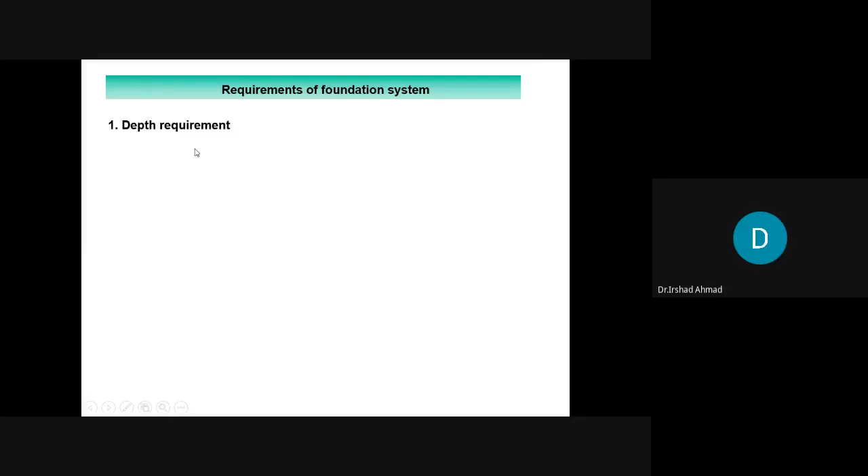Actually this is the second requirement. First requirement is the safety requirement. Second is the depth requirement, space requirement, and it should be economical and functional.

So let's discuss the second requirement, which is the depth requirement. What is the depth of the foundation? This is the ground line, and this is the foundation. This is the base of the foundation, which is called foundation level. The distance between the ground line and the foundation line is the depth of the foundation.

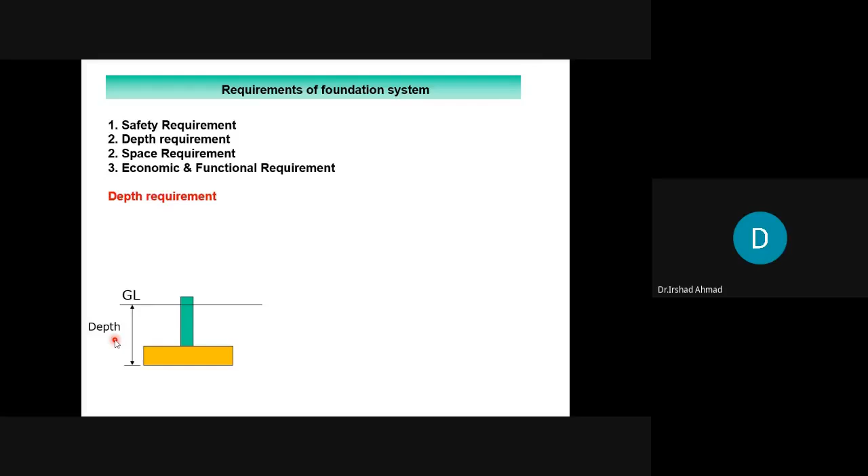How much should be the depth of this foundation? What are the requirements with regard to depth of the foundation? So the first thing you have to take care of with regard to depth is preventing movement due to

soil volume changes by seasonal freezing and thawing of the ground. What does it mean? When the outside temperature is very low, very freezing, the moisture close to the ground would freeze. And when that moisture freezes, the soil increases in volume. But when the temperature rises up, this thaws, it melts.

The moisture thaws. When it thaws, what happens? It shrinks. So this is, for example, the depth where this happens. This volume change happens due to freezing and thawing. So if you build your foundation base here, it would be subject to movement.

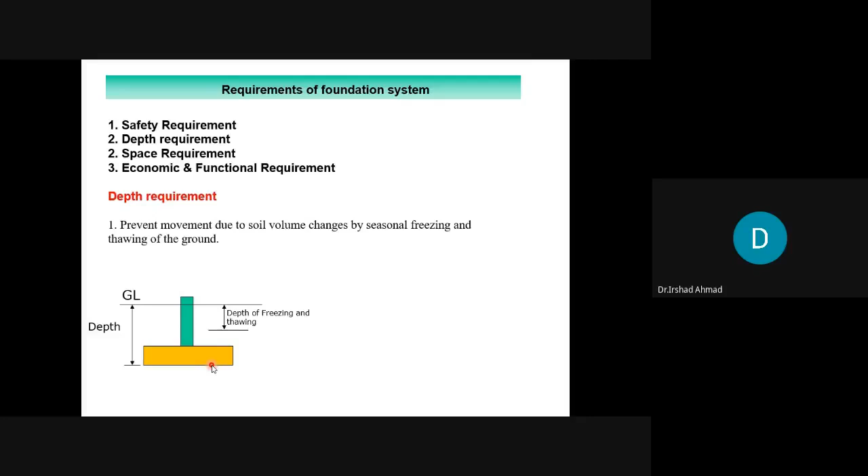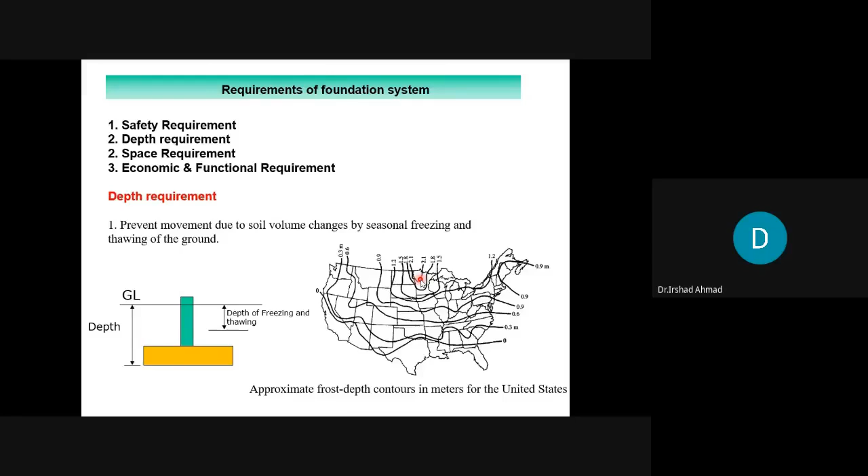Second requirement is: footing should be below zones of high volume changes due to moisture fluctuation. The first point was volume changes due to freezing and thawing, but the second point is due to moisture fluctuation. There could be leakage of pipes, leakage from washrooms, leakage from kitchens, or some rainwater seeping into the ground, or a street drain passing nearby the house.

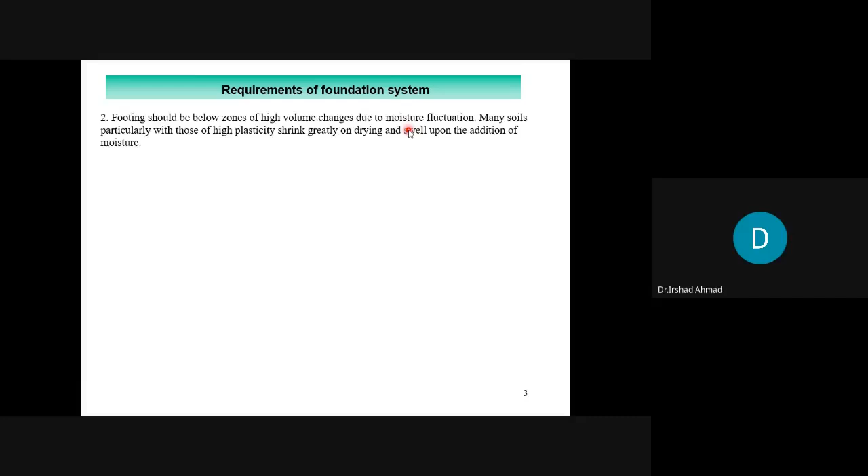There could be leakage, and that moisture can enter into the soil. So what would happen when the moisture reaches the soil? Some soil has a tendency to expand when it gets moisture, and when this moisture dries up, it would shrink. Again, that movement would be transferred. This is the zone of volume changes in soil due to moisture change. So the depth of the foundation should be below this.

Many soils, particularly those of high plasticity, shrink greatly on drying and swell upon the addition of moisture. So that is the zone of volume change. The foundation should be laid below this depth.

Prevent wind or water erosion. If you build a foundation on the ground surface, when the wind blows or when there is water flowing, erosion would happen below the foundation base, and this would undermine the structure. So you have to give some depth so that erosion due to wind or water does not occur.

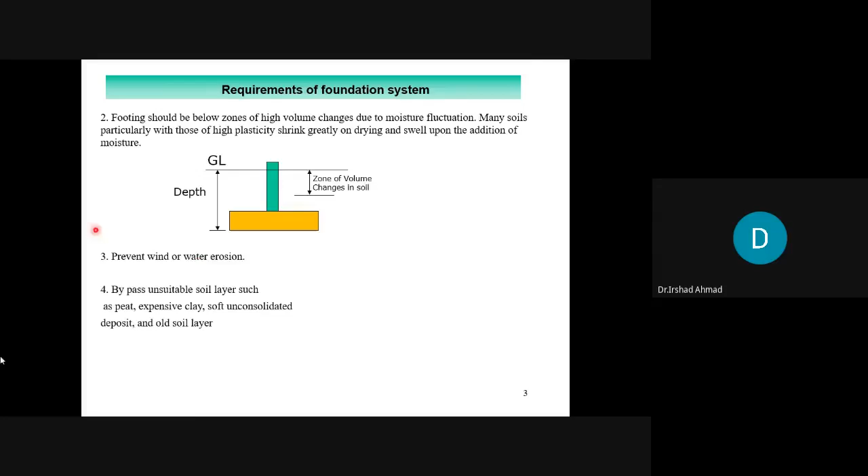The fourth and last point with regard to depth of foundation is bypass unsuitable soil. If you have some unsuitable soil near the ground, like peats or dump soils, you are not going to build your foundation on such fill material. Instead, you would start excavating the ground till you reach a very sound strata, and then you give the foundation. Or you can use a pile.

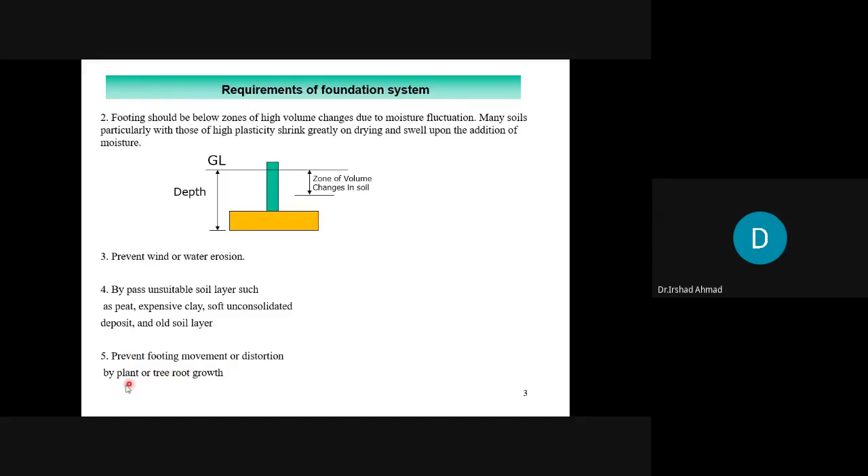The last point is to prevent footing movement or distortion by plant or tree root growth. If the building is close to a tree, the growth of tree roots could damage the foundation.

These roots suck water from the soil, and the amount is different during different seasons, so there would be some volume changes. That's why there should be a depth, so that the changes in volume due to roots does not affect the building.

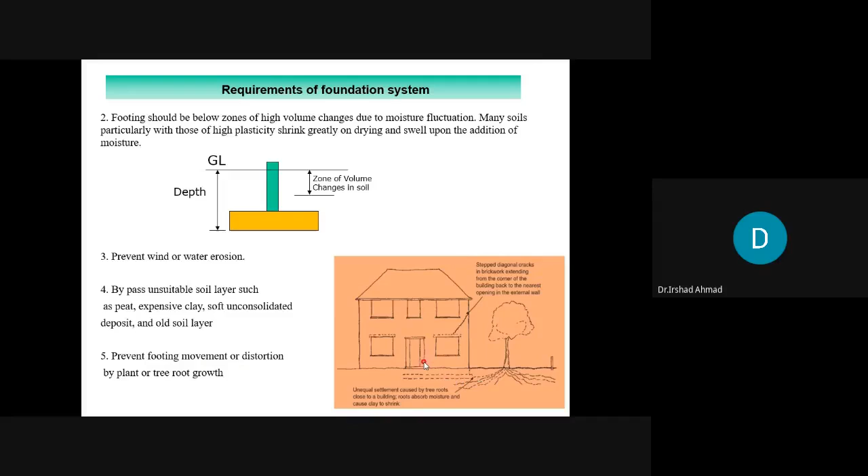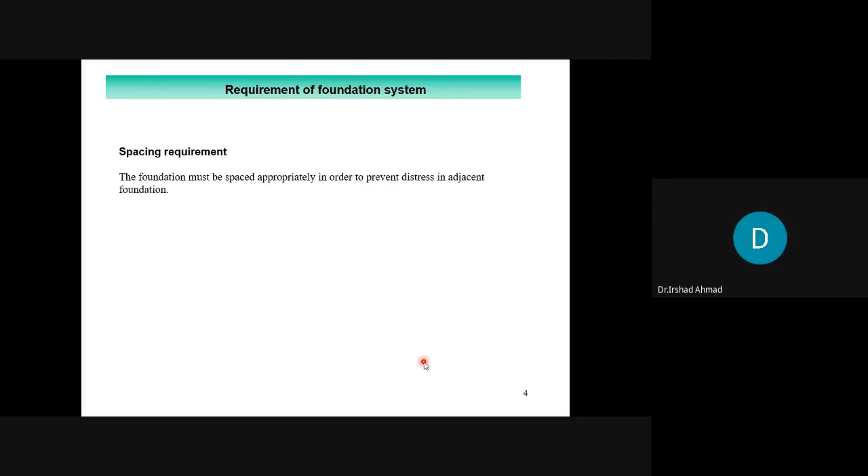The last requirement is the spacing requirement. The foundation must be spaced appropriately in order to prevent distress in adjacent foundations.

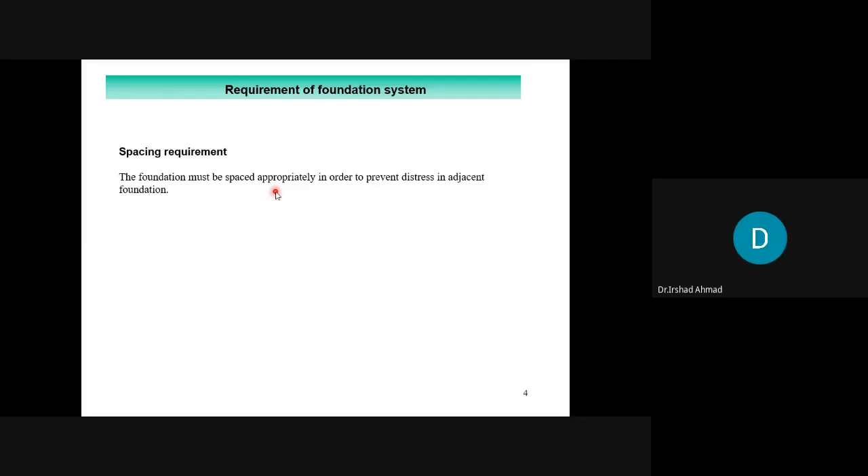If you already have a building, and you want to construct another building beside it, what happens if you excavate the soil below the foundation of the existing building? There could be damage. There is a video, let me share the screen so you can see this.

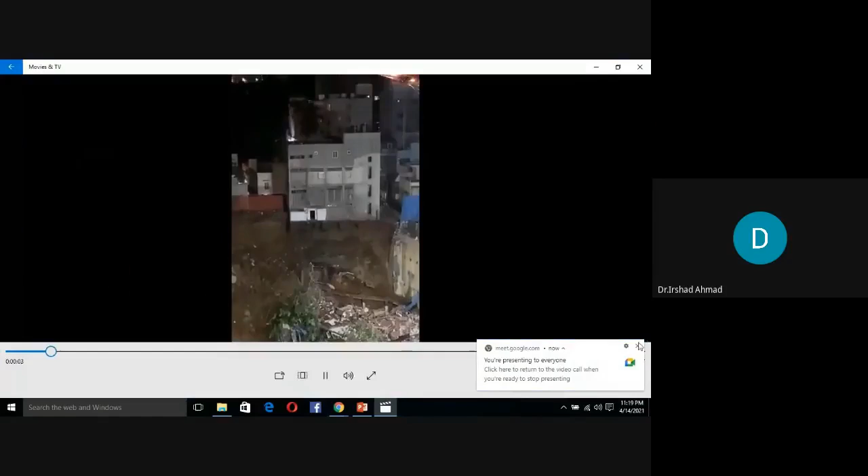You see, this is an existing building. Another building is going to be constructed, but the depth of the new building is much below the existing building, you have given a greater depth. So what would happen? This could happen depending upon the soil condition.

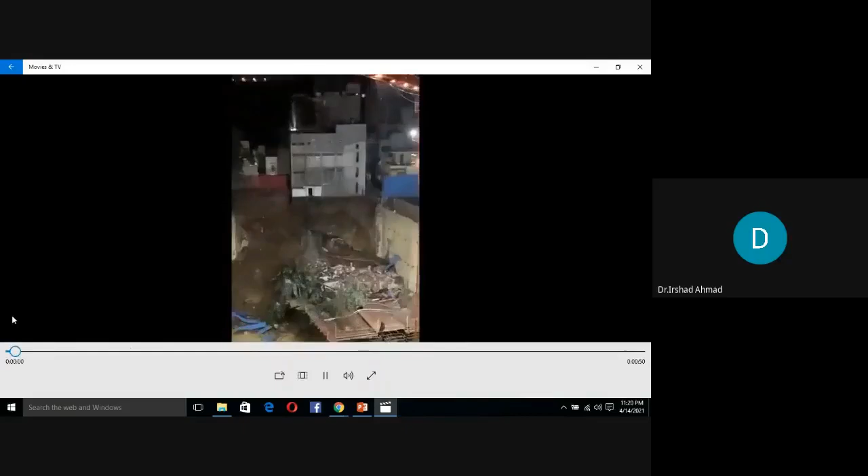So either you have to space your new building much away from the existing building, or you have to provide some supports to the excavation. So what is going on here? No lateral support is provided to the existing building, nor is the new building appropriately spaced.

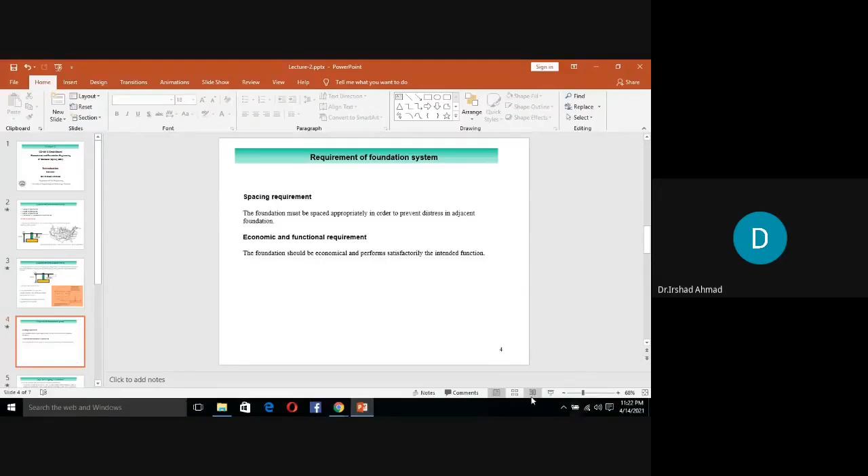At last, the foundation that you are going to design and construct must be economical, and it should fulfill all the functions for which it has been designed. So these are the requirements of a good foundation system. Number one was safety requirement. Number two was depth requirement. Number three was spacing requirement. Number four was it should be economical and functional. These are the four major and basic requirements of a foundation system.

If you have any question, you can ask. No question, sir.

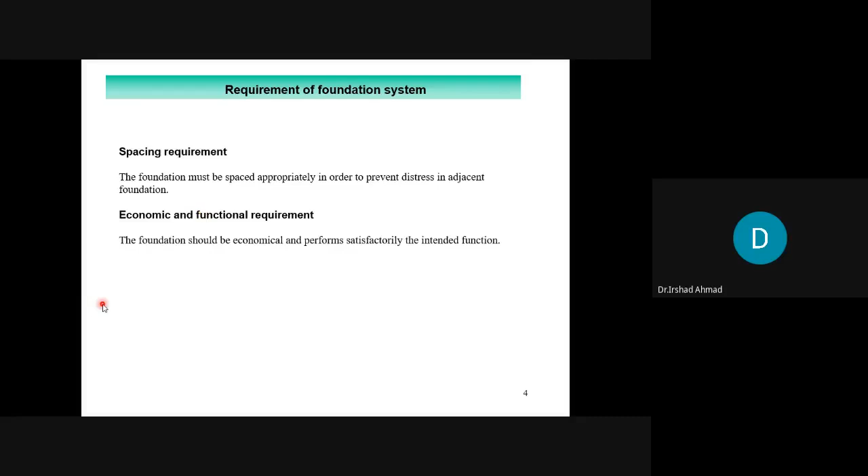Steps for designing a foundation.

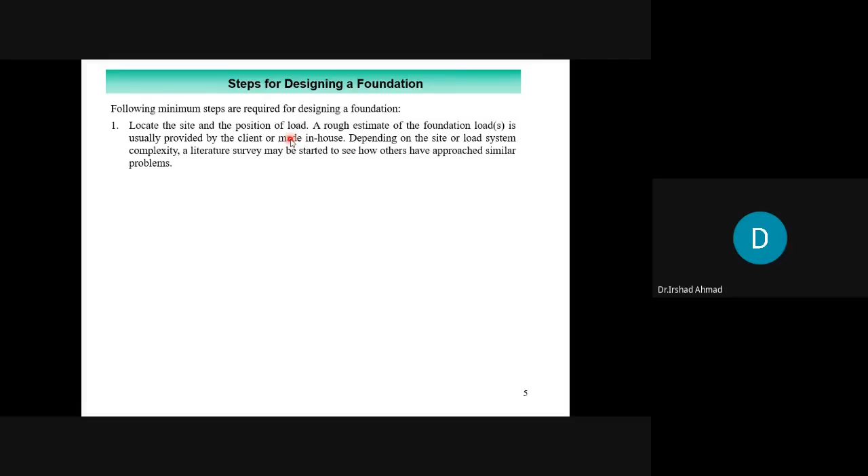You should have an idea where the loads are positioned, where heavy columns are coming, where lift walls are coming, where shear walls are coming. Usually during site investigation this is not available, but when designing a foundation, you must know the load position and also the loads. A rough estimate of foundation load is usually provided by the client or made in-house. Depending on the site or load system complexity, a literature survey may be started to see how others have approached similar problems. So you should have an estimate of the foundation loads before designing a foundation.

It could be given to you by a structural engineer, and usually this is the case. Structural engineers do the analysis and give you the loads. In developed countries, in major consultancies, there is a structure office and a geotechnical office. The structure office does the structural analysis and gives you the loads. But at the time of soil investigation, you do not have a very clear idea of the loads.

Second, you go physically to the site for any geological and other evidence. You go and see how the topography of the site is. Is it flat or hilly terrain? Are there trees or flowing streams? You check if there's a slope and whether there's pre-existing slope failure. You record all these observations.

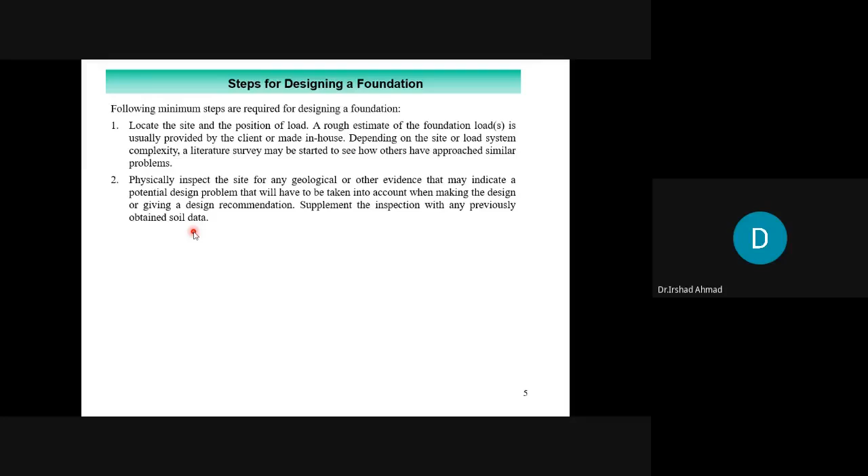If you have data from previous boreholes in or around the site, that gives you a very good idea of the subsurface. If you're running a geotechnical lab, you may have data of the surrounding sites. With that, you have a pretty good idea of how the field exploration should go, and at this stage you establish a field exploration program.

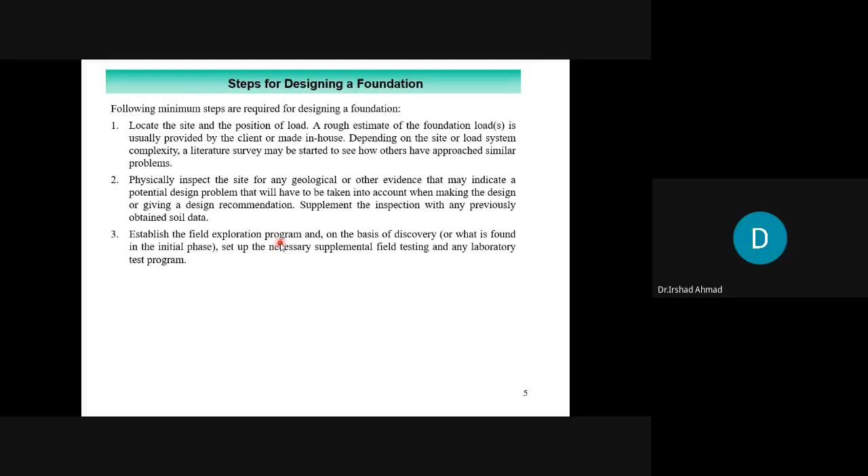How many boreholes should there be? What should be the depth of the boreholes? What type of tests should you conduct in the field, and what type in the laboratory? If you already have information about the strata, that's a tremendous help. Otherwise, you can drill some preliminary boreholes to get a good idea of how deep and how many the rest should be.

When you conduct all these tests, boreholes, field tests, laboratory tests, for a big project you might do, say, 30 boreholes. You have plenty of data. So what do you do with that data? After conducting these tests, you have a large amount of data on your table, and you need to design your foundation based on this data. But there is a lot of scatter in the data.

So based upon your experience, you extract soil design parameters from all this data. You may need Excel sheets or other programs to help organize the data and get the soil design parameters.

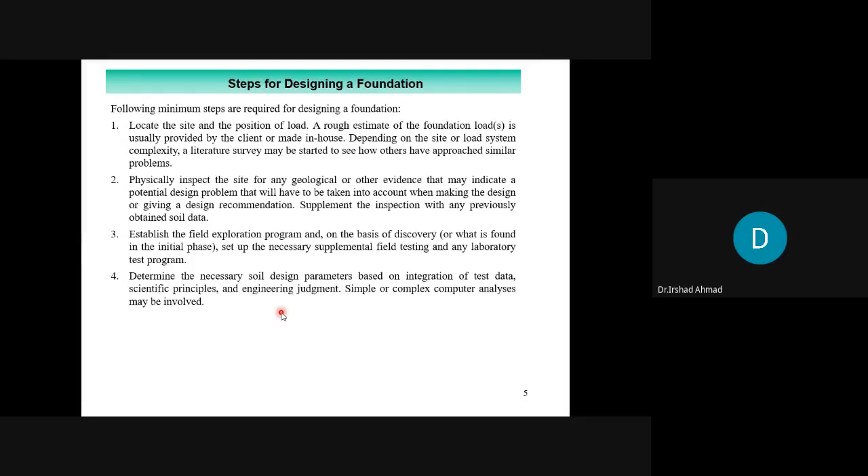Once you get the soil design parameters, you design the foundation using them. While designing the foundation, you need to interact with the client, because the client pays for the foundation cost. You also interact with the engineers, particularly the structural engineer, the architect, and the contractor, since the contractor is the one who will actually build the foundation. Does he have enough resources and technical background to build the foundation you've designed?

A computer program for designing is a must nowadays. For example, if you're designing a mat foundation, you have to do the structural analysis, get the moments, and design the foundation. These are the major steps involved in the design of a foundation.

For any major project, normally it's the structural engineer who designs both the superstructure and substructure, and he already has some bearing capacity value from the geotechnical lab. That's the routine. But for major structures, there has to be interaction between the structural engineer and the foundation engineer.

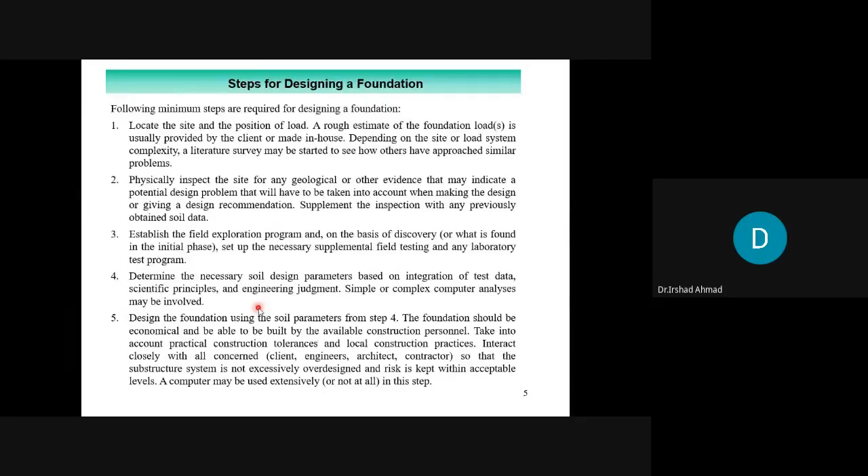You need subsurface information, for which you drill boreholes, or conduct non-destructive testing, called geophysical testing. Geophysical testing means you don't drill any borehole, but do other tests you might have studied, like seismic reflection survey, seismic refraction survey, multichannel analysis of surface waves, or soil resistivity tests. These tests are conducted on the surface but give information deep into the ground.

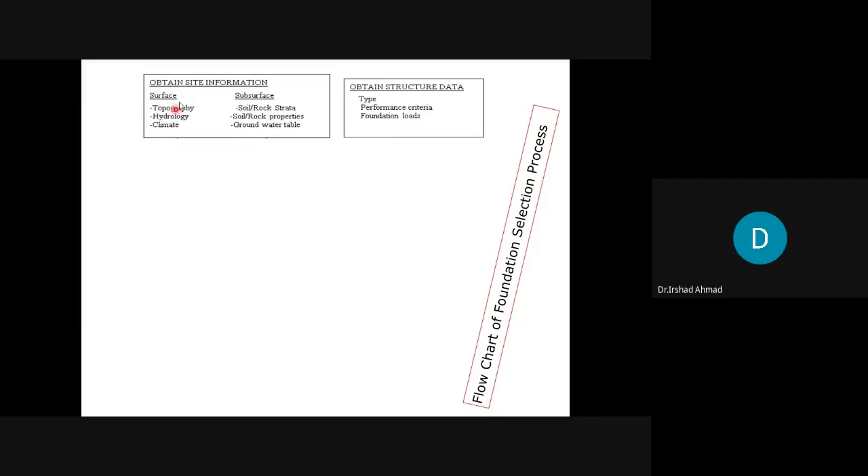Then when you get the soil information, you got the structure information, you go down and you have foundation alternatives. If you have a menu of foundations to pick from, you have shallow foundations. In shallow foundation, you have square footing or isolated footing, strip footing, combined footing, combined rectangular, trapezoidal, strap footing.

Or mat foundation. You have deep foundations like pile foundations, ground modification for shallow foundations. This is not a type of foundation, but this is an alternative. Where there is weak soil available, you have an alternative to replace or improve that soil and provide a shallow foundation. Or you can go for a deep foundation. Whatever is economical, buildable, you go for it.

Anyway, you pick an alternative, probably first from a shallow foundation. Why shallow foundation? Because it is easy to construct, it is economical. Then you go down and see the behavior - how much this foundation would settle? What would be the bearing capacity? Its lateral stability, any environmental problem...

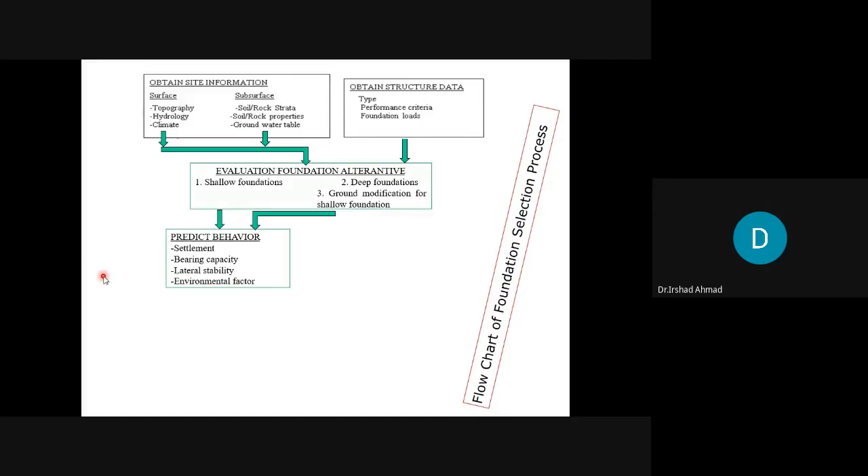for constructing this foundation. Then this is the predicted behavior. You compare this with the required behavior. For example, settlement is 3 inches, but you require 1 inch, so that foundation is not going to work. Or the bearing factor of safety with regard to shear, you require, for example, 3, but it comes out to be 2. Similarly, lateral stability.

And you do the cost estimate as well here. If your foundation is not working, the behavior is not good compared to the required behavior, what you would do - you go back and select another foundation type. So this cycle would go on unless you reach the final answer. Final answer would be that the predicted behavior compares with the required behavior, the cost is minimal, there is no potential construction problem. Then you go down and recommend that type of foundation.

And then you build drawings and prepare detailed design plans, specifications. And after that, you can also monitor construction. Monitoring of construction, you can put some instrumentation in your foundation, and as the building is being built, you can monitor the actual behavior and see if this actual behavior is...

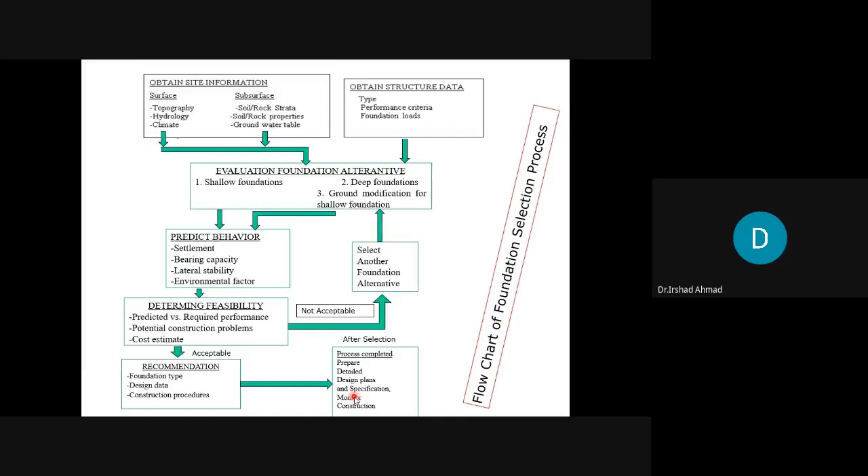Types of load - we talk about loads, so we will briefly talk about load. What are the different types of load? You already have an idea. There are principally 3 types: dead load, live load, and environmental loads.

Dead loads are those like self-weight of a material, of a building, like the weight of the wall, weight of the slabs, weight of the beams, weight of the columns. They are fixed in their position, fixed in their magnitude, so they are called dead loads. They are more deterministic. They all come upon the foundation. The foundation must be able to deal with dead loads.

There is another category of load which are called live loads, like human load - the people who use the facility. There is a variation in the magnitude. At some events, the mall will be filled with people.

But at any other time, like night time or early morning, there were few people, right? Also, it is not fixed in location, the people move around. So this is called live load.

There are other loads that are environmental loads, like snow, wind, suction, earthquake. All these loads are environmental loads. So the structure and the foundation must be able to resist all these loads.

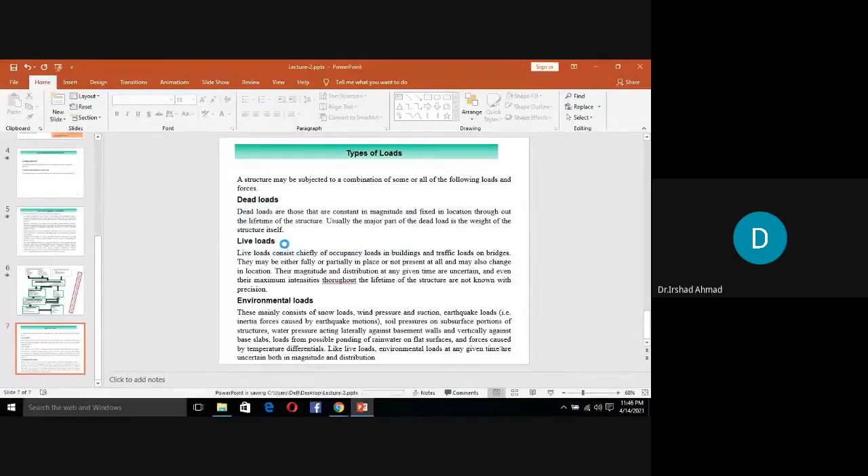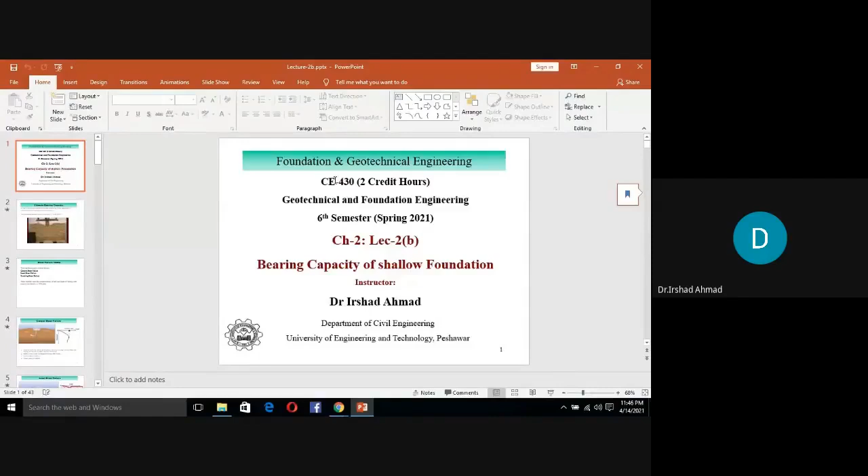This is chapter number 2, lecture 2B. This is about bearing capacity of shallow foundation. This is a very major chapter, and it will take about 4 more classes to complete.

Initially we will have some definitions about different types of bearing capacities. Then we would have what are the different types of shear failures. Then we will have some bearing capacity equations, which are Terzaghi and Meyerhof. Then we would solve examples. So all this would take about 3 to 4 more lectures.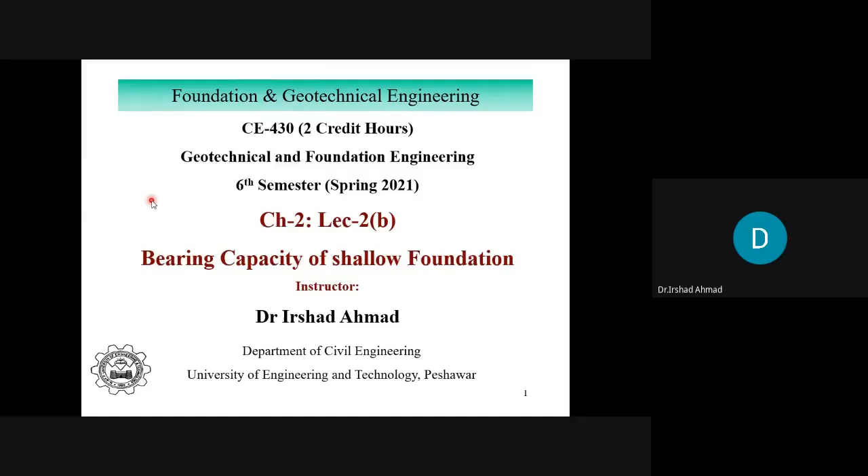So let's start. That is ultimate bearing capacity. Can anybody tell me what is the ultimate bearing capacity?

The load which a soil can withstand. Yes, to some extent, but more specifically, can anybody answer? Soil has no ability to bear more load beyond its range, that is ultimate bearing capacity.

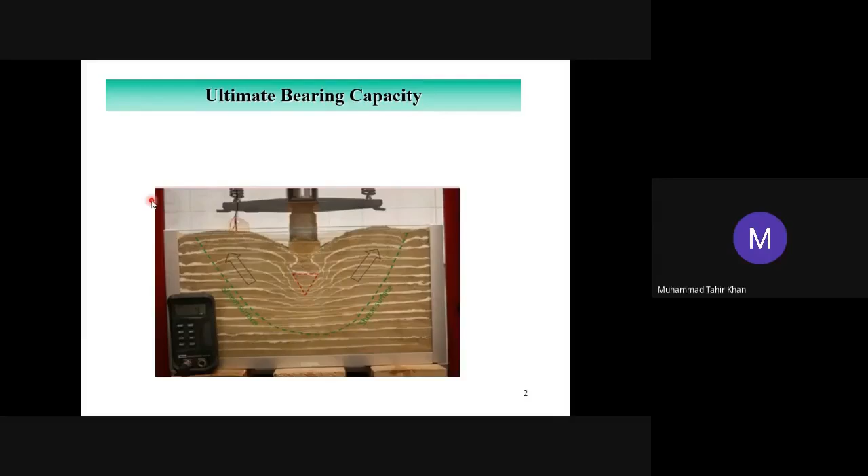In the first lecture, I discussed with you a simple example, right? And what was the value of ultimate bearing capacity in that example? Can anybody recall? 10 tons per square foot. That was the value of ultimate bearing capacity.

Theoretically, it means that if you apply a pressure on the soil, if the foundation applies a pressure of 10 tons per square foot, the soil would fail in shear under the foundation. If you apply 9 tons per square foot, theoretically it would not fail in shear. But if you apply more, like 15 or 20 tons per square foot, it would fail in shear.

So the definition would go like this: it is the least pressure which would cause shear failure of the supporting soil immediately below and adjacent to a foundation. If you apply load on the soil, it would deform like this and develop shear planes. That is called shear failure of the soil.

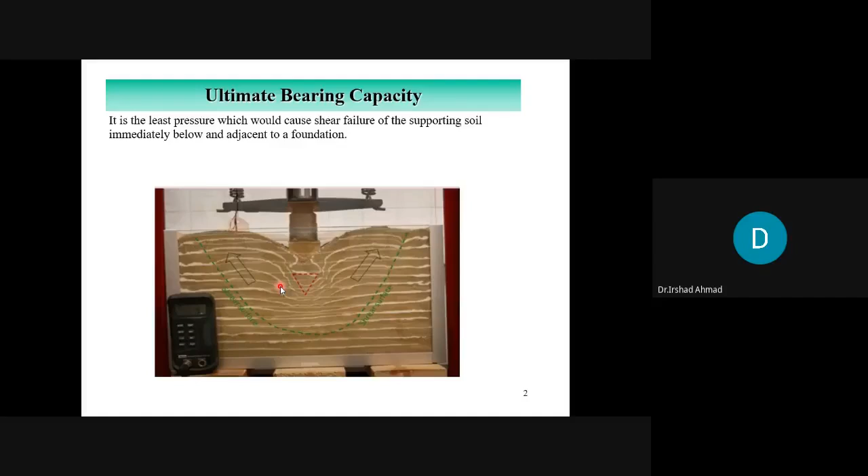Unit of ultimate bearing capacity is of stress units, like kPa, kilonewton per meter square, or ton per square foot, or KSF, kips per square foot.

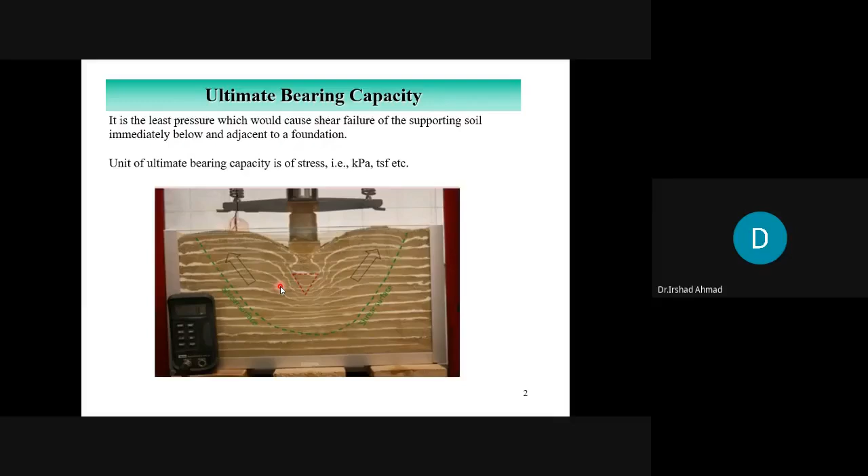Let's talk about different shear failure modes. There are 3 types of shear failure modes: general shear failure, local shear failure, and punching shear failure.

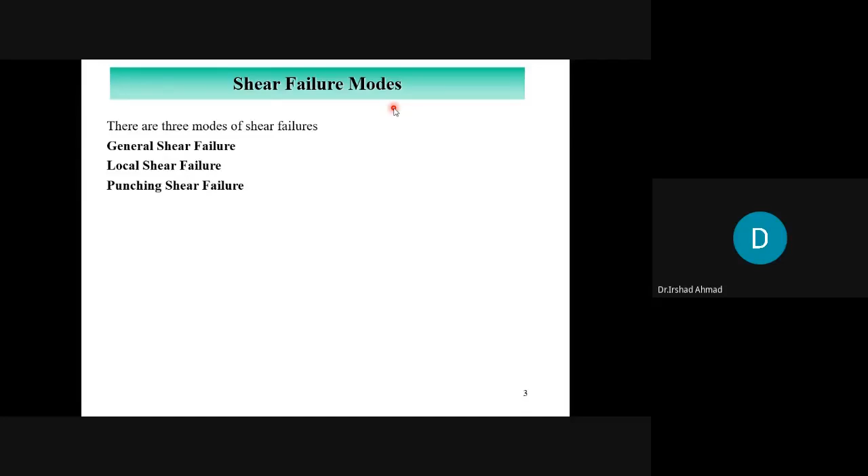Let's first talk about general shear failure, but prior to this, which of these 3 types would occur depends upon 2 parameters: compressibility of the soil and depth of footing with respect to its breadth, meaning how deep the foundation is. So there are 2 things. First we will talk about compressibility, and then we will talk about the effect of depth of footing.

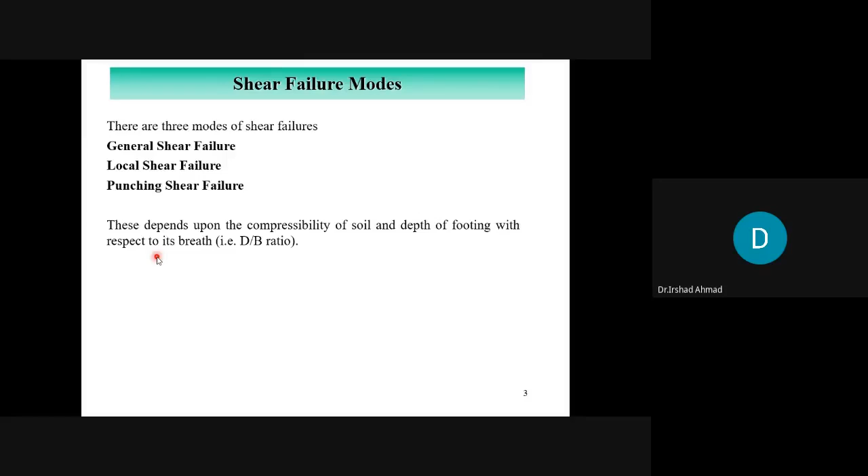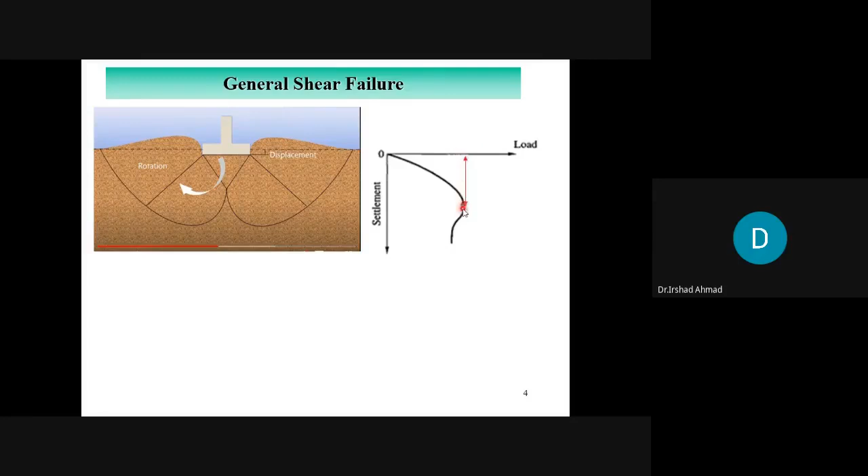So this type of failure is characterized by a well-defined failure pattern, consisting of a wedge, and slip surfaces and bulging of the soil surface adjacent to the footing. Sudden collapse occurs, accompanied by tilting of the footing. In general shear failure, when the failure occurs, you would see there is a tilting, the foundation would tilt on one side, it would rotate on one side. This occurs in dense or very stiff soil.

Failure load is well defined, you can read the failure load from the curve very easily. This is called general shear failure. If you have any question, you can ask.

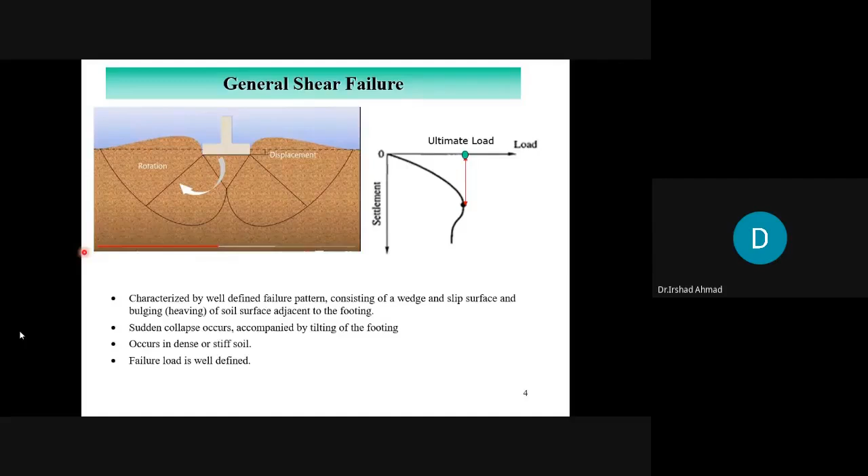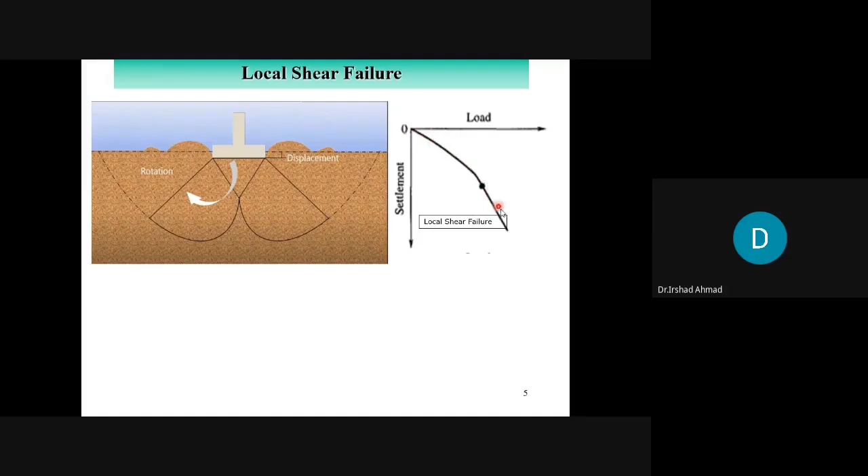Now, local shear failure. Local shear failure would occur in compressible soils. The shear planes are developed like this, but they do not go up to the ground, and there is slight bulging. But there is greater displacement compared to the general shear failure. The general shear failure curve would come somewhere here, but local shear failure would be down here, with greater displacement.

This is general shear failure. For the same load, there is greater displacement in the local shear failure. The failure pattern consists of wedge and slip surface, but is well defined only under the footing. Slight bulging of soil surface occurs. Tilting of footing is not expected. Large settlement occurs, and ultimate load is not well defined - like in the case of general shear failure where you pick the load clearly, here it is not very well defined. This occurs in soil of high compressibility.

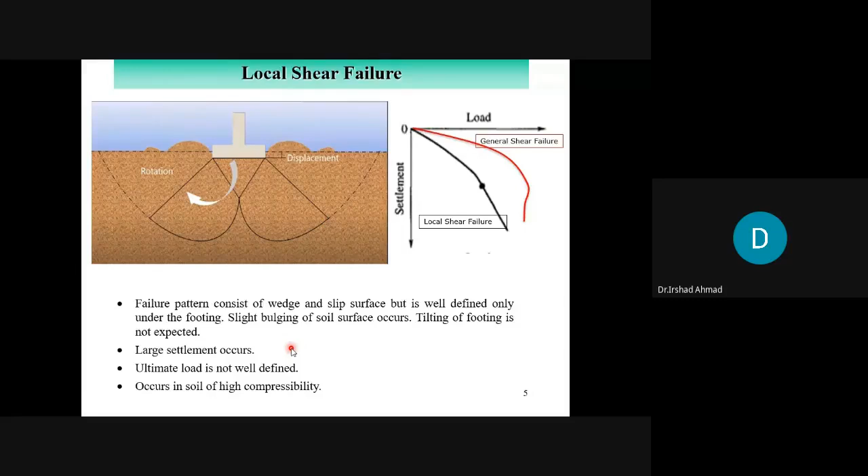The third one is the punching shear failure. This occurs in very soft soil. As you apply load, plastic movement would occur, and the foundation would continue to settle with large displacements. The curve would be like this - you see, this is general, this is local, and this is your punching shear.

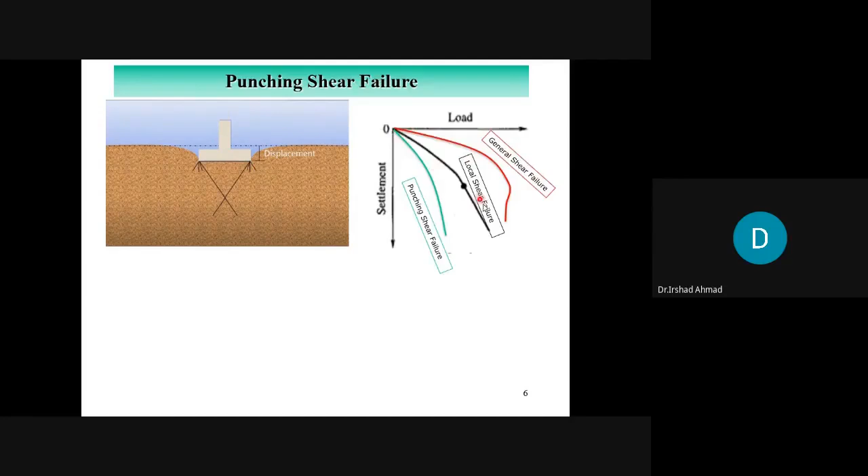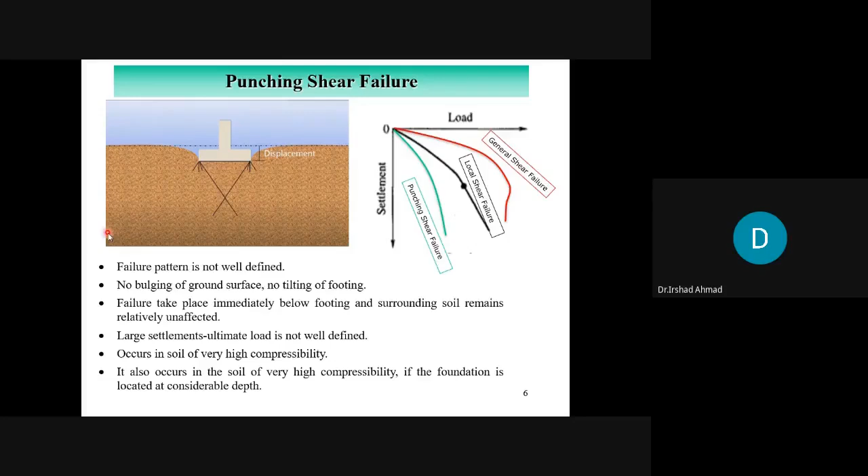Here, the failure pattern is not well defined. You see, you cannot pick the peak. The slip planes cannot move up because these are not very stiff soils.

No bulging of ground surface, no tilting of foundation. Failure takes place immediately below the footing and surrounding soil remains relatively unaffected. Failure occurs just below this, it moves down like a punch, it is punching into the ground. This occurs in soil of very high compressibility.

The last sentence, I'm not reading, I would explain it to you, but till now, if you have any question, you can ask.

So this is one aspect of shear failure types, which was based upon compressibility of soil. Another aspect I told you is about depth of the footing.

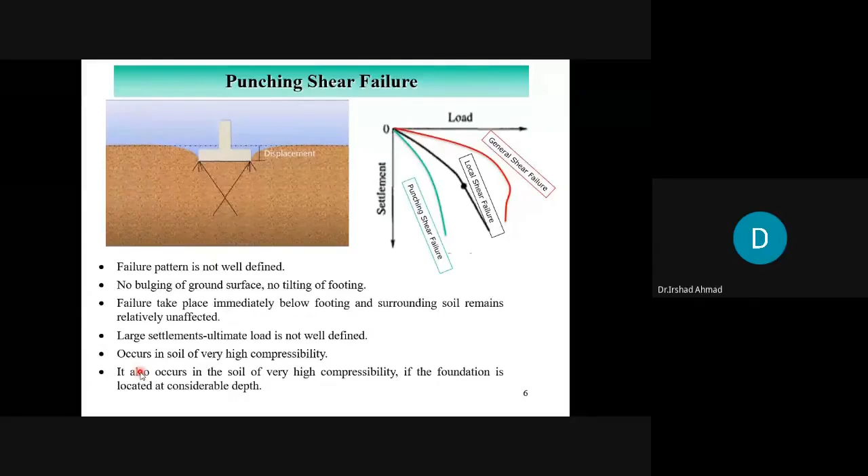Capacity, all these have been discussed in this class. We have reached up to this slide.

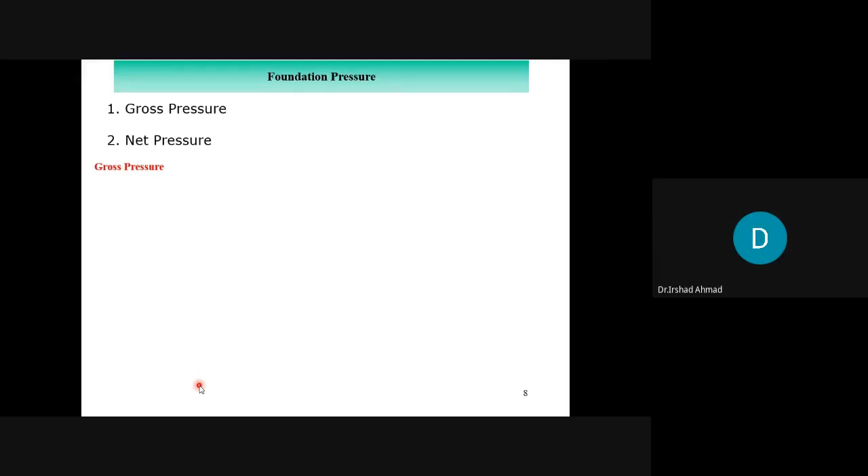So at this level, what do you think the pressure would be? From which sources? What are the sources of pressure at this level? Can anybody tell me?

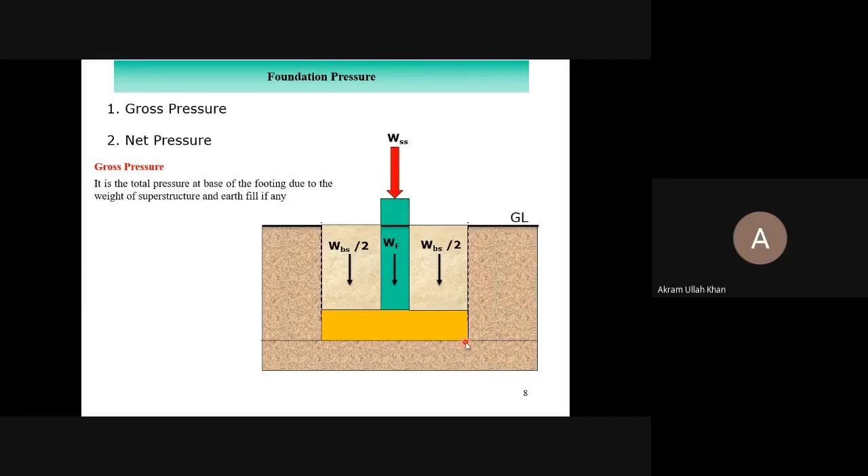And divide by the area. Which area? The lower foundation area. So for square footing, what would it be equal to?

Assuming this is the depth of the foundation and this is the breadth of the foundation - this is D, depth, and this is B, width of the foundation. So what would be the foundation area for a square footing? B square. Okay, good.

Q gross would be equal to WSS, WF, WBS divided by A, which is area of the footing. And Q is equal to gamma D.

The pressure outside the foundation plane is the self weight of the soil. This is unit weight of the soil, and this is D. Q is equal to gamma D.

Let me explain this area again. This area, B into B, is the area of contact of the foundation with the soil. For square footing, it is B into B. What is this A? It is the area of contact of the foundation with the soil, which is distributing this load.

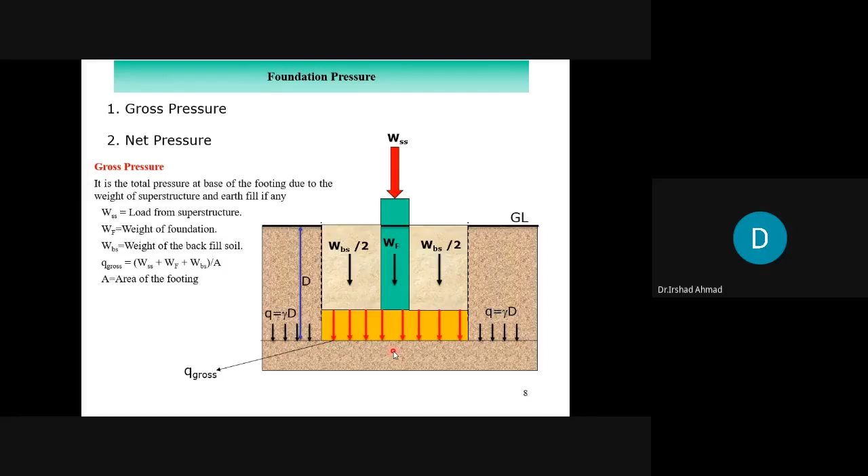It is as if there were 2 bags on your back, and I remove these 2 bags and put 10 bags. So how much is the increase in the load? It is 8 bags, right? So that increase in load is called net pressure.

Prior to the construction it was Q is equal to gamma D. After construction, it's Q gross. Net pressure is Q gross minus gamma D. This is called net pressure.

You can put in the values of Q gross here. Q gross is this from the previous slide, and minus gamma D.

In this equation, if you assume that weight of the foundation and weight of the backfill soil is same, you assume that weight of the foundation, which is concrete, is roughly equal to the weight of the soil.

So weight of foundation plus weight of the soil divided by area would be roughly equal to gamma into D, unit weight of soil into depth of foundation. Do you agree with this? Yes, sir. Okay.

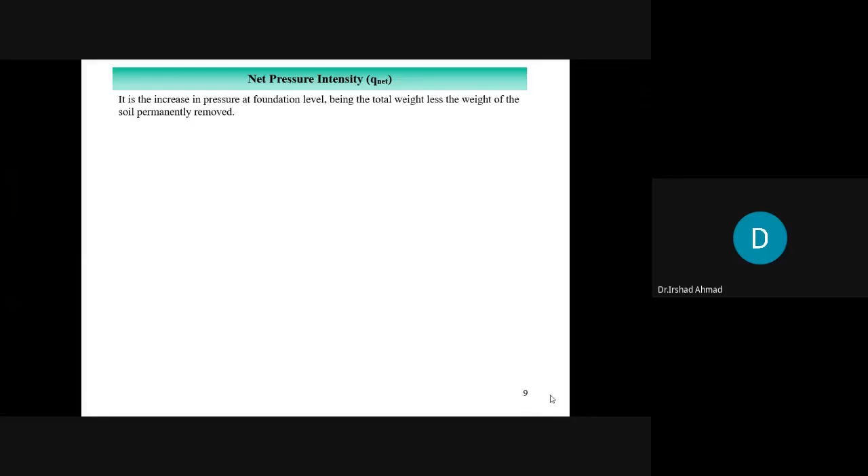Bismillahirrahmanirrahim. So that was the net pressure intensity. It is the increase in pressure at foundation level, being the total weight less the weight of soil permanently removed, that we explained.

Safe bearing capacity. Can anybody tell me what is safe bearing capacity?

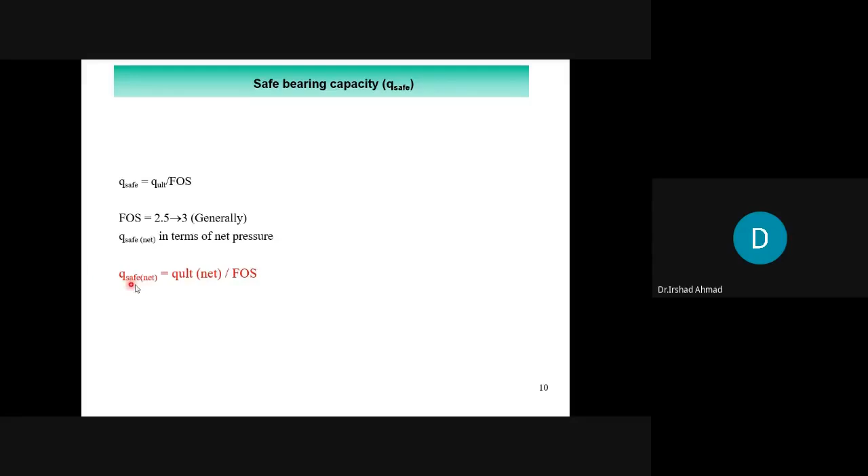Q safe could be represented in terms of net pressure. Q safe in terms of net pressure is equal to Q ultimate in terms of net pressure divided by factor of safety. And Q ultimate minus gamma D, divided by factor of safety, is Q safe in terms of net.

From where will you get this Q ultimate? That would be from different methods. The ones we would discuss are the Terzaghi bearing capacity equation and the Meyerhof bearing capacity equation. From there you will get Q ultimate, minus gamma D to make it net, divided by factor of safety, so you got Q safe in terms of net.

So if you use this equation or that equation, what is the difference? Where does the difference lie? What does it actually mean? If you are using this equation, your applied pressure should be less than or equal to Q safe. This is the limit. Q safe is the capacity of the soil, and the applied pressure should be less than Q safe.

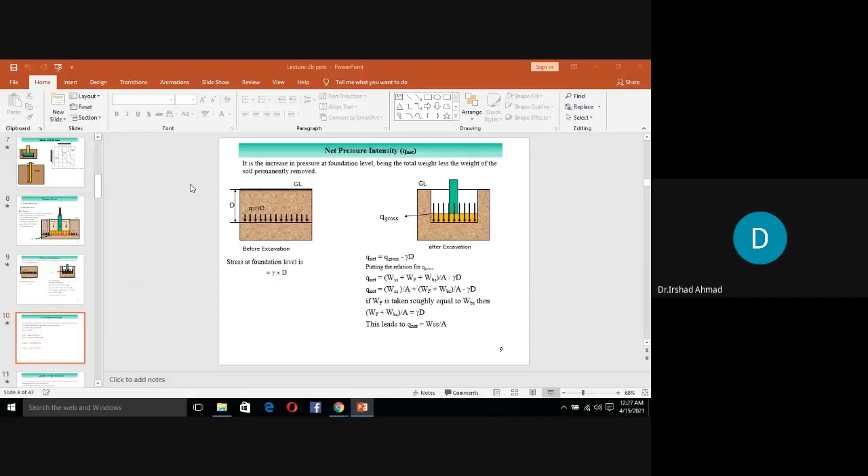Let me write it here. Should be less than or equal to... if you are using net pressure, then the applied net pressure will be less than or equal to Q safe in terms of net.

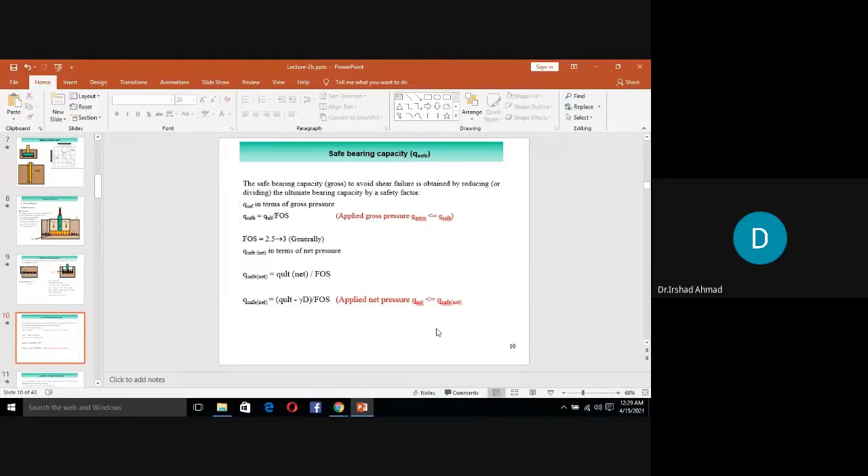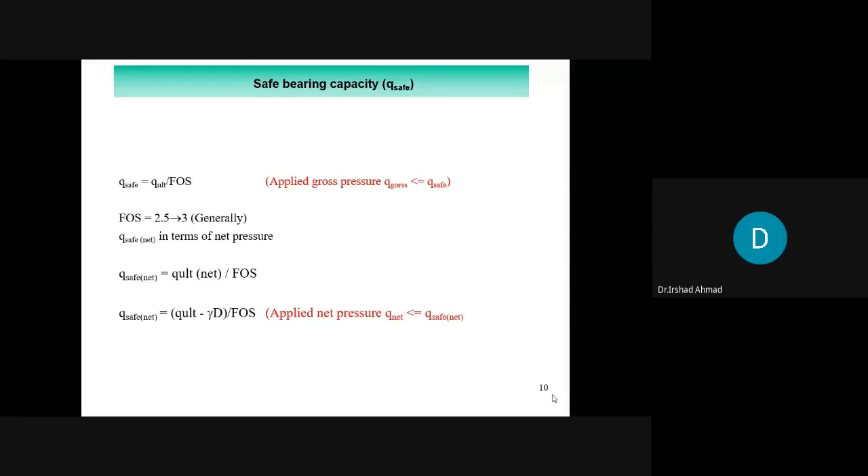If you have any question, you can ask.

If you remember in the example, ultimate bearing capacity I divided by the factor of safety. One is safe bearing capacity, which was 2.5 ton per square foot. Another value was related to the settlement of foundation: for 1 inch settlement of foundation, the pressure was 1.8 ton per square foot, if you remember. So the minimum of these two pressures is actually the allowable bearing capacity.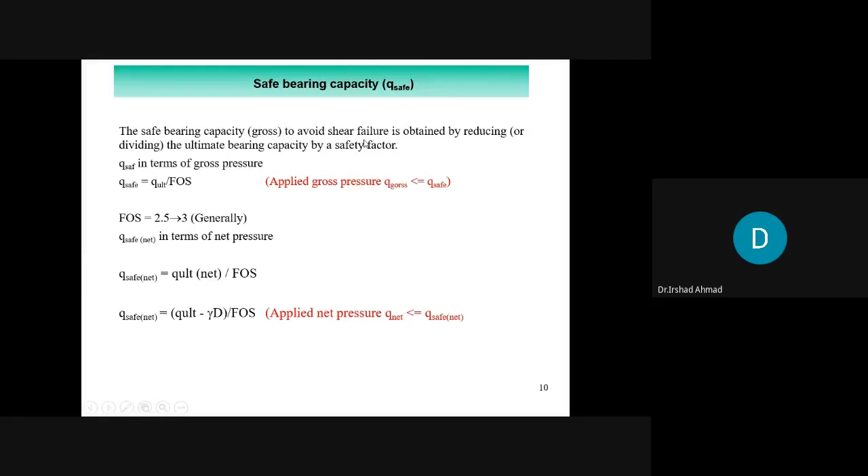Allowable bearing capacity is the one that takes into account both shear failure and settlement. This Q safe only takes into account shear failure, to avoid shear failure. But Q allowable takes into account both settlement and shear failure. So allowable bearing capacity is the maximum pressure which may be applied to the soil such that two fundamental requirements are satisfied. What are those two requirements?

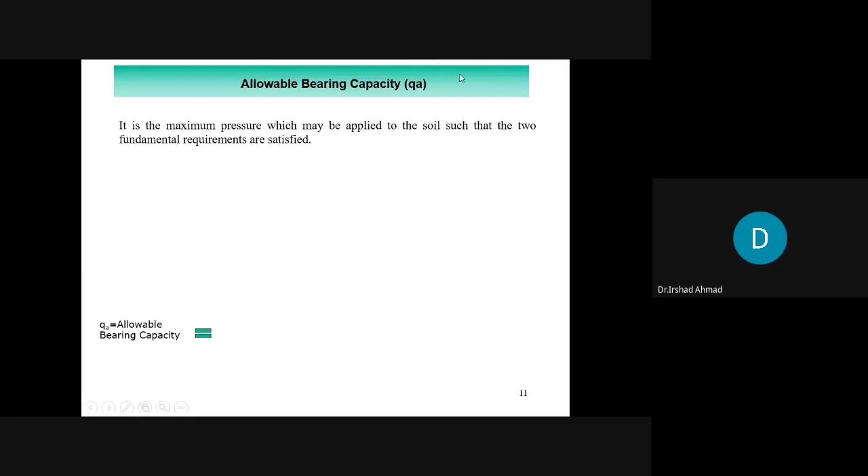Limiting the settlement to a tolerable amount, and preventing shear failure of the supporting soil, are the two requirements.

If you remember, in the example, the value of B was 2.5 ton per square foot and the value of A was 1.8 ton per square foot. We have two criteria: the shear criterion, Q safe net equals Q ultimate net over factor of safety, which guards against shear failure of the soil. The next criterion is the settlement criterion, Q net, that limits the settlement to a tolerable amount. In the simple example, this value was 2.5 ton per square foot and this value was 1.8 ton per square foot.

So whichever is minimum of these two will give you the allowable bearing capacity. Can anybody tell me what would be the allowable bearing capacity you need? Less than 1.8, or 1.8 itself? So what does it actually mean if the allowable bearing capacity is 1.8 ton per square foot? What are you going to do with this value?

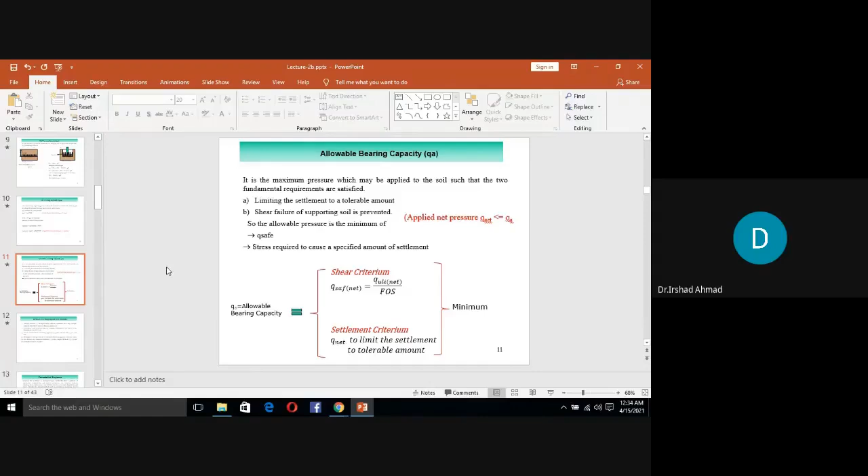Understood? Any question?

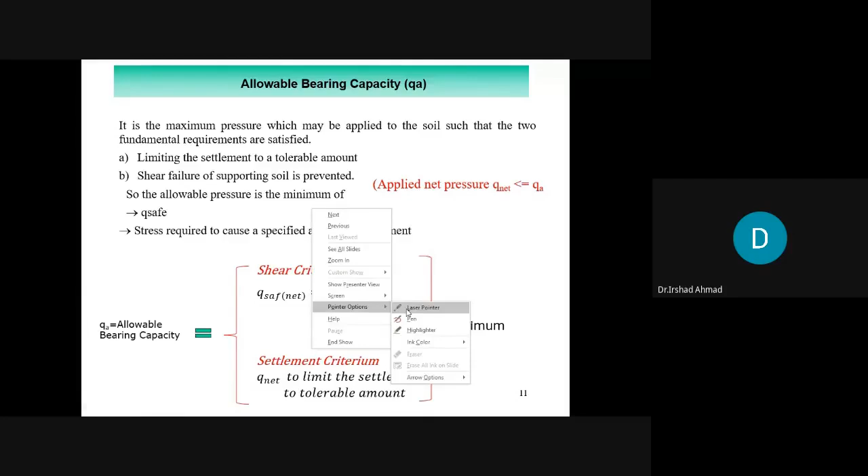In any design you do in civil engineering, like designing a beam or a column, two things must always go parallel. One is called strength criteria, the other is called serviceability criteria. If you are designing a beam, the beam must not fail in shear or flexure — this is the strength requirement. Another requirement is the serviceability or settlement requirement: you may have designed a beam strong enough that it would not break, but it could deflect or settle in the middle.

So here too these two criteria run in parallel. Number one is related to the strength criteria, the second is the serviceability criteria. Both should be followed. In some cases there would not be any shear failure, but there would be settlement which is not acceptable, and the settlement criteria varies for different structures.